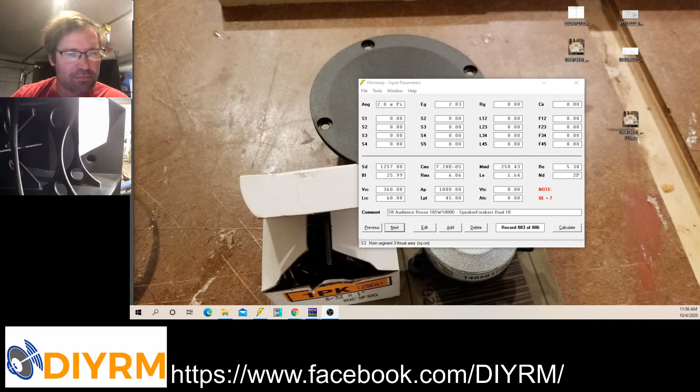Everybody, let me know if you can hear me well. I have changed my audio around from last time. I'm actually using a mini DSP right now for the microphone. Turn that video off. Hey, Brian. Hey, Daniel. Yeah, I did a quick recording and it seemed a lot better, so we'll use this. I've actually got a really nice large diaphragm Audio Technica microphone, but it requires 48 volt and another interface, and I haven't gotten to the point where I've got that thing mounted on a shock mount boom hanging over my head, but maybe we'll get there at some point.

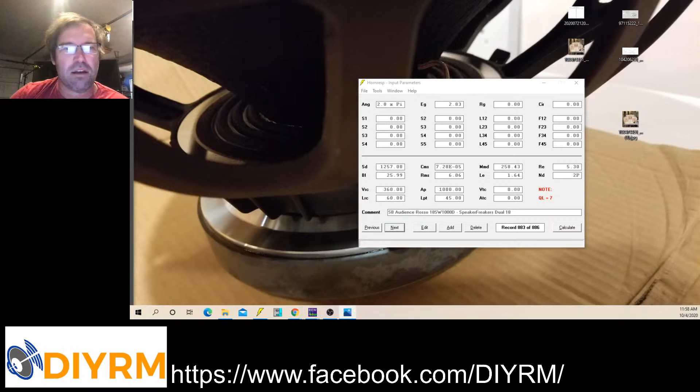So I should pull this up. Give everybody a little in-process picture here. We'll wait a few more minutes, let folks join. Yeah, the interface regime on this thing is already getting a little crazy. Oh, I just remembered. I have one where one channel is broken, but the other channel works just fine. I might pull that one out, but then I've got two different brands. What I really need to do is, my mixer can serve as a digital interface too, and I may just have to go there one of these days. So we'll see.

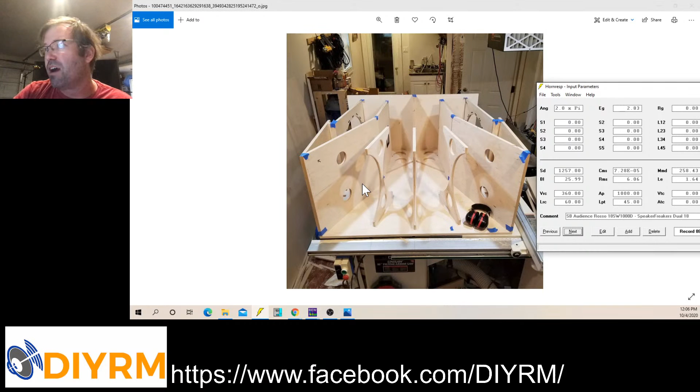And even then, there's still going to be some sort of higher order modeling effects for the airflow and things like that it may or may not take into account. But David, in general, has done a phenomenal job, and the fact that he gives this thing away for free is amazing. So if I'm ever where he is again and we can meet, he's got dinner on me for sure. And whatever bottle of wine he wants to pick off the menu, frankly, for as much as I've used this thing.

So it used to be that if you're going to do a horn-loaded speaker in Hornresp, it was a lot of sort of trial and error to even remotely get the inputs started. The input to Hornresp can be a little challenging. Until you get the hang of what means what physically, this interface doesn't make a lot of sense, right? So right now I've got a bass reflex. Recently, David has added an input wizard feature that is far more advanced. I don't remember which of the billions of versions of the program that came out in, but it's been quite handy and takes a lot of the pain and difficulty out of it.

How do you determine QL? You can only input QL for a bass reflex box, which is what this record is, and for larger boxes, a QL of 7 to 10 is about right. Smaller boxes or some sort of heroic construction, you can get higher than that. Remember that, but we'll get back to that. As soon as I go to, let's say, a horn-loaded box, you can see that the QL thing here goes away, right? So you can't enter Q anymore. I don't know if David will ever add that feature, but we'll see.

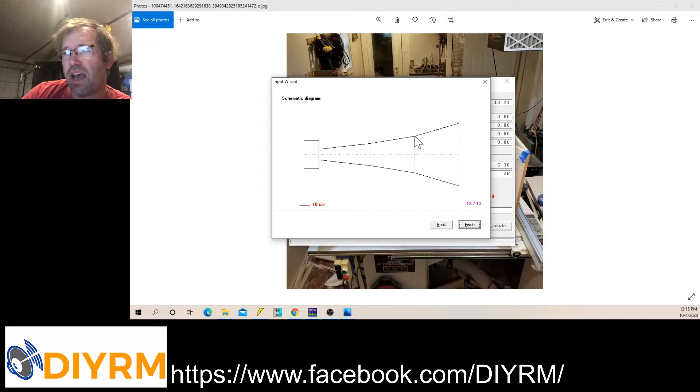This value here is S1. This is L12. This is S2. This is L23, S3, L34, S4, okay? And so when I say finish, it has chosen their default loudspeaker; it has not put the real speaker parameters in there. When I select finish, it generates this file for you, which is really handy because you used to have to sort of know how to put all of these things in.

And so I can calculate it, and lo and behold, because that is a beastly driver, and he sort of already knows which driver he's picking for this thing, he gets a pretty good response out of this. In fact, that's an excellent response. But what you'll see is it's not really so much of a bass horn. It's got 105, where's 102? F3 of 80 hertz. So I would call this a kick if you were in the PA world. This is much more of a kick, or even low mid, depending on what you wanted to call it.

But going back to that schematic diagram, you can see it has transferred everything in there. You can start changing this. Now, the easiest way to modify a horn in Hornresp is not to enter things onto this screen. I don't find that particularly easy at all. I hit Control E, and that pulls up an entry format that he calls the Loudspeaker Wizard, and you get these sliders. I find this to be far more useful because you can go to the power, which is the SPL of the system, and you can start changing things, and you can see what's happening to the resulting frequency response.

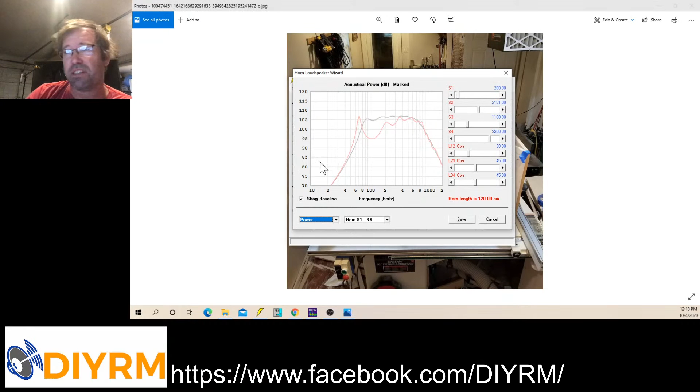Okay, for instance, I just made S2 very large. In fact, S2 is now larger than S3. And if we go back and look at the schematic for this thing, this is going to be a very funny looking horn, right? And you can see that that has been very bad for the frequency response. You wouldn't want to do that, okay? But if you're not using his driver, this screen is a great way to input your parameters and understand what you're doing physically very quickly, instead of entering them into the previous one, hitting calculate, and then trying to remember the way they were and how much of a difference it has made, right?

So we're going to go back to not a flower vase on its side here. And we're going to take this back to the horn-ish that was originally generated, okay? So I've chosen conical here, and I have no idea what the difference is going to be, but I'm going to change them all to parabolic, and lo and behold, whoops, release capture results, capture current results, input parameters. Now we're going to change them back. So tools, compare captured. I have now compared the difference between the parabolic and the conical expansion for those lengths, okay?

Where I found that it actually starts to make a difference is if you're doing really long tapped horns. But very often I don't find this to be enough. Again, check, make sure that you haven't simulated something wrong, but I would check this pretty regularly, okay? So there are some rules of thumb for large bass horns, right? You see these all the time, printed out, about mouth circumference being a wavelength, and total length of horn being at least a quarter of a wavelength and things like that.

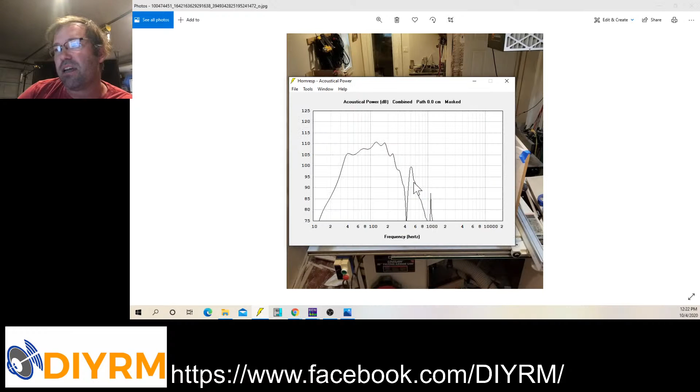So this is the horn that I have built that's behind me. And it is an offset driver horn. So I'm going to hit calculate here, and we're going to see this response. And first thing I'm going to do is go to the schematic, okay? So this schematic view confuses a lot of folks, I think, in Hornresp, because they don't realize what they're looking at. These circles here represent the driver. They represent the enclosure for the driver. Again, he's assuming everything's a round circle, right?

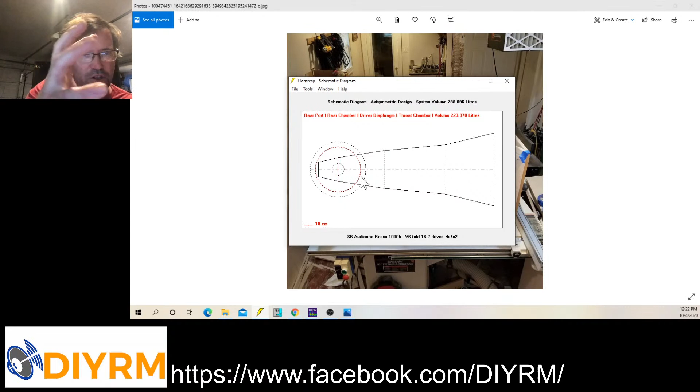They are, and it's sort of turned, instead of front way, to sort of look at you, right? And so I'm actually on this horn injecting the pressure from the driver into the point at S2, okay? I converted this horn to a front-loaded horn so you can kind of see the difference between the schematics. But when I do that, it puts the entry point into S1, which is too tiny. Okay, and we'll get to that in a second. That's compression ratio, and that's too tiny.

So now you can see that this is the rear chamber. This horn is actually ported. It's a rear-ported offset driver horn. It is not a simple design. We'll get to why I did that in a second. Yeah, so this is the schematic for the horn. You can see that the total box size is just under 800 liters, okay?

On Wednesday, on my Facebook page there on DIYRM, I released a sort of tongue-in-cheek, laughing horn folding flowchart, which Brian mocked because he does these way cooler spreadsheets. In fact, he has a spreadsheet, if we can convince him to release it, for this type of fold.

No pressure, Brian. I'm not trying to peer pressure. Peer pressure. Not trying to peer pressure. Yes, I am. Yeah.

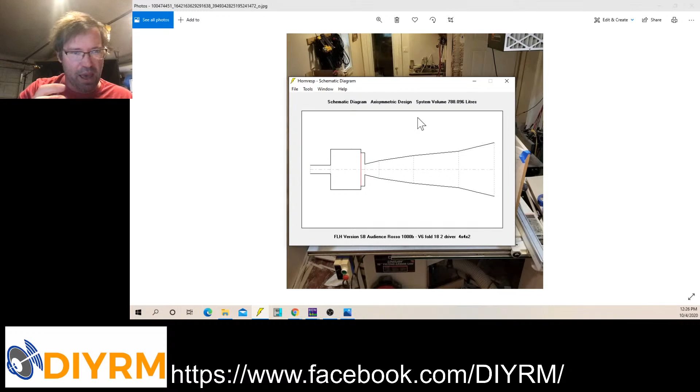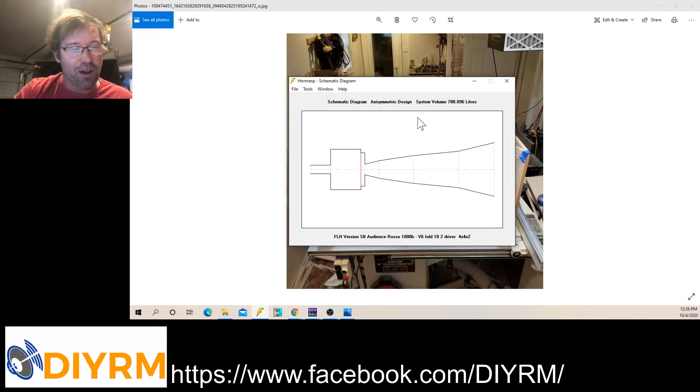With Brian's great spreadsheets, that iterative process is a little less painful because it's much easier to shift panel dimensions around and just export the record, import it into Hornresp, and voila, resimulate it. Versus if you're trying to do a really fancy fold that's not covered by one of those spreadsheets, like the fold that I have here, and I don't know the Visual Basic behind those spreadsheets well enough to start creating one or modifying one, and so I ended up having to do this sort of very painful graphical way. And I have an example of that. And I don't have SketchUp on this machine.

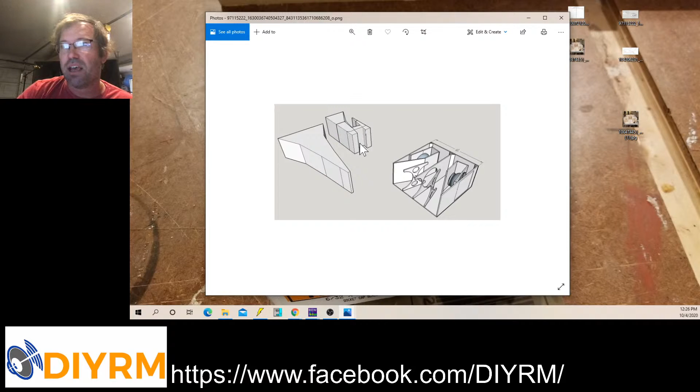But this is the example of how I did that, right? So the first thing I did was sort of create this 3D shape of the fold. Then I cut it in half and I started wrapping it around so that I could fit this thing into a box. And with enough tries, I could actually go back and forth, and you can see where I was. Let me zoom in on this some.

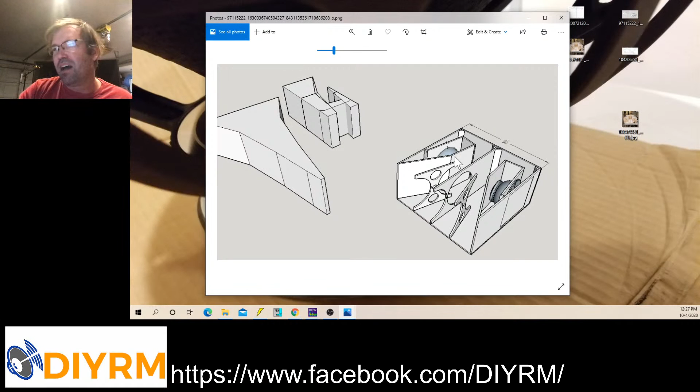You can see here where I was sort of playing with the S3 or S4 dimension here, the second to last dimension, in respect to getting the magnet for the driver that I had for this speaker to fit. SB Audience was very nice and gave me access to some of their Rosso drivers, which I'll show you a data sheet for in a second. But the catch with that woofer is that the magnet's gigantic, which is awesome. Like, that's an awesome thing. But then when you try and put this into a rear chamber, you've got to fit that magnet in there. Okay, and so there's this iterative process that you do.

All right, let me close out of there. So let me go back to the actual horn. So I'm going to run through some features in Hornresp that I don't know if a lot of people know are there. Okay, so the first thing I'm going to do is, actually, I'm going to turn editing on. So the first thing I'm going to do is show you this is the predicted response, and here, let me again zoom in on that, is some measurements I took. Now, take these measurements with a grain of salt, especially,

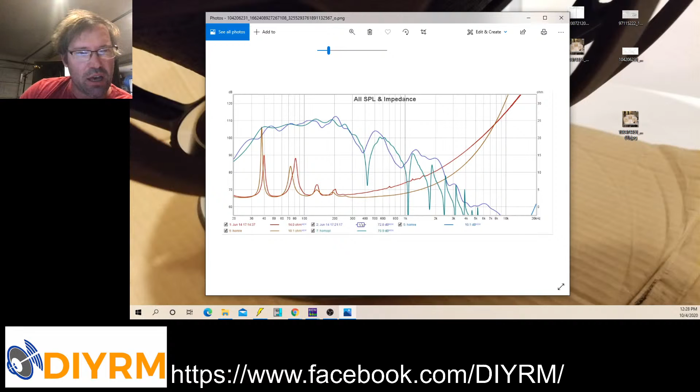Do I prefer a compression driver with a good horn or a 3/4 inch dome tweeter with a good waveguide? Yes, I prefer them all. It depends on what I'm doing with them. If I'm doing a high output PA speaker, obviously I will prefer the compression driver. If I'm doing a Synergy horn or co-entrant Unity style horn for home audio, I will probably still prefer the compression driver. But it all depends on the application, right? I have heard some phenomenal sound from relatively low-cost compression drivers that give you dynamics that a 3/4 inch or a 1 inch dome tweeter cannot hope to achieve, period.

So this is the simulation versus the measurement of one of these horns. Down low, I actually think that it's probably a little bit closer than the response would indicate. There was a lot of change in response based on microphone position when I was doing this. I was doing this in my back alley, which you can't see because the garage door is closed behind me. But there is a 3-story apartment building next to me. There is an 8-foot tall fence behind me. There's my house, which is 2 stories. So there's all kinds of stuff that is in the way. So this isn't a true anechoic measurement as much as I'd like it to be.

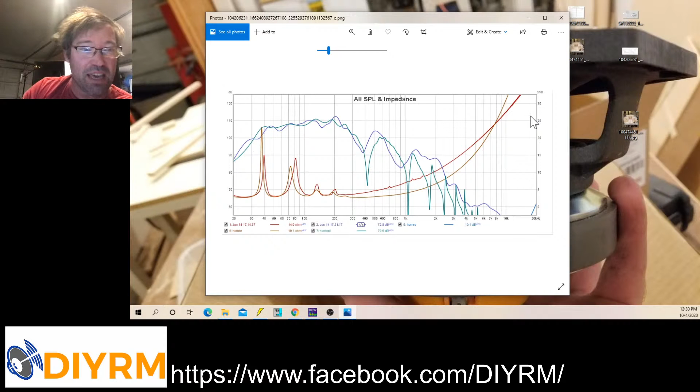It's just not. And if you measure a horn too near field, then your response is not quite right. There's reasons for that. But yeah, I basically couldn't get the microphone far enough away and not pick up ambient stuff. So I have a feeling that they're actually even a little bit closer. So to me, even this amount of agreement is not bad. Like, this is pretty good agreement. My guess is it's a little closer.

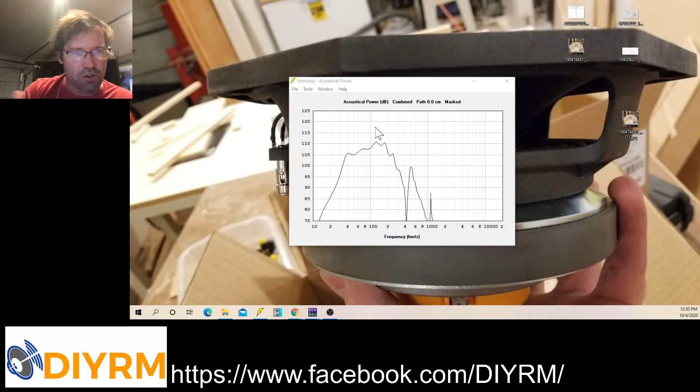So one of the things that you have to realize when you have this sort of imperfect horn, right? This mouth is too small, right? Is that when you put two large front-loaded bass horns together side by side, they acoustically see each other and they will help each other out.

So they see each other and they get benefit. Now let me show you, because Hornresp actually models this pretty well. Okay, and I've confirmed this multiple times. So first off, let me capture these results. So what I'm going to do is I'm going to change the input voltage from 2.83 volts to 2 volts. Okay, calculate, tools, multiple speakers. And now I'm going to put two whole speakers in parallel with each other. Now, by going from 2.83 volts to 2 volts and doubling the number of speakers, I'm keeping the input wattage the same. Okay?

And now I'm going to compare captured. Okay. See how at low frequency I actually get a boost there? That boost is real. They help each other out, and you have even higher sensitivity than you otherwise would. Okay, and this has been shown. I have shown this with Danley... Hennessy battle axes. I have been lucky enough to measure a fairly large block of them in a field. To do it at any reasonable input power, to start looking for compression, things like that, I had to put the microphone 70 feet away. But this benefit is real, okay? I can show you even more benefit.

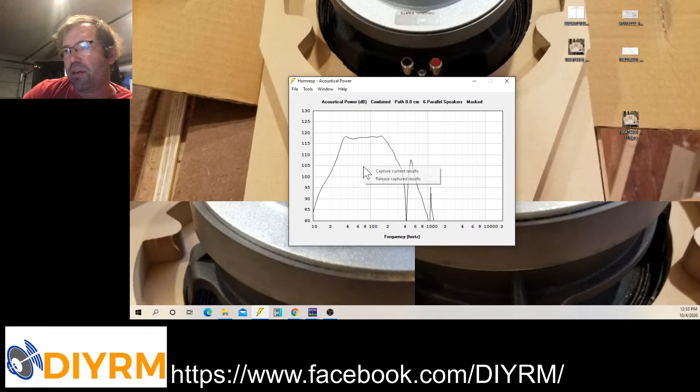tools, compare captured, all like this up and down ripple has gone away, right? Because now I've made the mouth large enough. They all sort of couple to each other. Tapped horns don't get this benefit, or if they do, they don't get it nearly as much. I don't think they get it much at all, actually. And even Hornresp shows that in the modeling, if I remember correctly. It's been a while since I've checked that.

All right, so what are some other cool things that Hornresp does, right? It'll show you, of course, the diaphragm displacement, group delay. All those are neat, right? Hopefully, if you've used Hornresp at all, you'll recognize those things. But let's go back to acoustical power and double click on efficiency.

It actually will calculate for you the electrical to acoustical efficiency. And this is where you can see this horn does pretty well, right? Up in the higher registers, it actually has quite high efficiency. It's pretty unheard of, but it is actually happening. But you're not going to get it easily at 80 hertz, or what frequency is this? 70 hertz, 60-something% efficiency, okay?

The other thing it will do for you is, if you go to output, port, whoops, let me do this, output horn, okay? This is the output of the horn by itself, and I'll talk about that port in a second. Okay. Tools, sound pressure, throat chamber exit. It will actually calculate the amount of pressure in pascals, which you can convert to PSI, on the driver diaphragm.

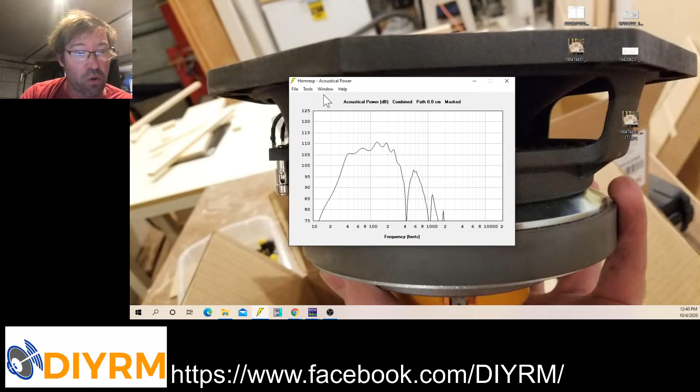What else? Ports. I mentioned that I was going over the ports. Okay. So the ports in this horn design that I've got behind me are not designed for low frequency output. I don't care. Their output is so negligible compared to the horn itself that I'm not using them for output.

I'm using them because front-loaded horns, especially big ones for PA use, tend to have a problem in that you take this driver and you put it in a tiny box that's sealed. The front of the cone can't see the outside air. The back is completely enclosed. And so now this driver has no way to cool itself.

Within the PA industry, it is well known that this happens, at least with the folks that are experienced with big PA horns. And you will see, for what are otherwise very high output speakers, some long-term limiting settings that you look at and go, that seems really low. But if you can't get the heat out of the box, it's realistic, right?

If you think about how hot a 150 watt light bulb gets, if you put that 150 watts into a 3 cubic foot box, that air temperature in there is going to be raging in short order, and you'll actually burn up those woofers pretty quickly, right? Whereas if you put them in a vented enclosure where there's heavy air exchange through the vents, there's some fresh air replacement. JBL had a great paper on this in the AES.

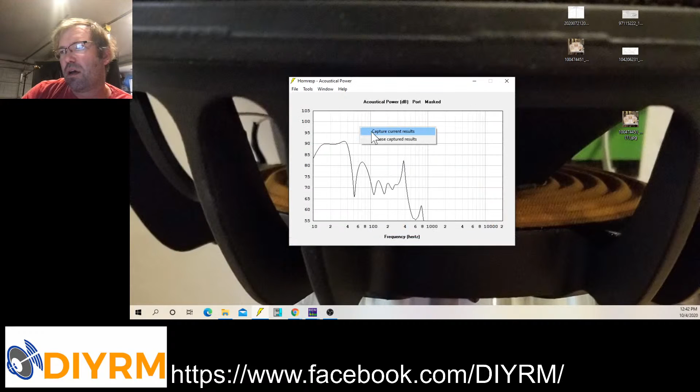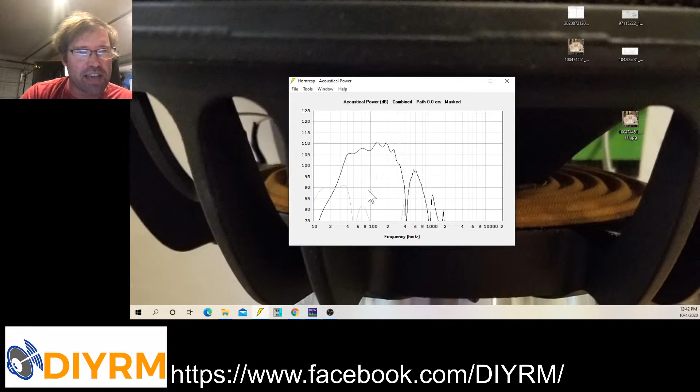So what I did is I took output port, tools, compare captured. Whoops. Come on. Release captured. Capture results. All right. Tools, compare captured. So right now you're looking at the output of the port versus the output of the horn. Notice how little the port actually does for this thing. It is solely there for air exchange.

Okay. So now we're going to go to another feature in Hornresp. Let's see. Another feature in Hornresp. Let's see. Any questions? I'm flying here, so I don't want to.

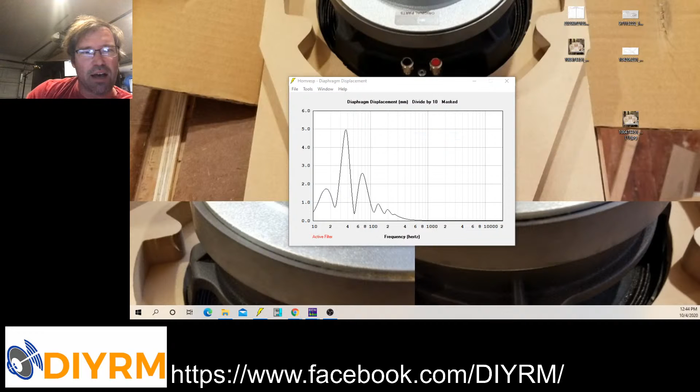We are going to add a filter. Filter Wizard. High pass. Fourth order. Actually a little high for this. So now I have put on a high pass filter. And now you can see where I've kept the displacement at low frequencies down. And you can see where I've kept that diaphragm pressure way down. Okay, so now I have aided this quite a bit.

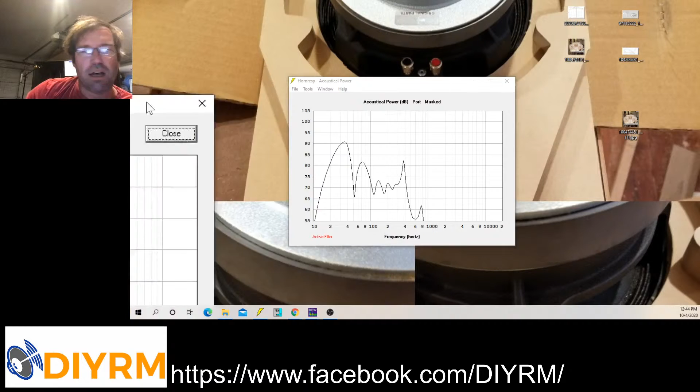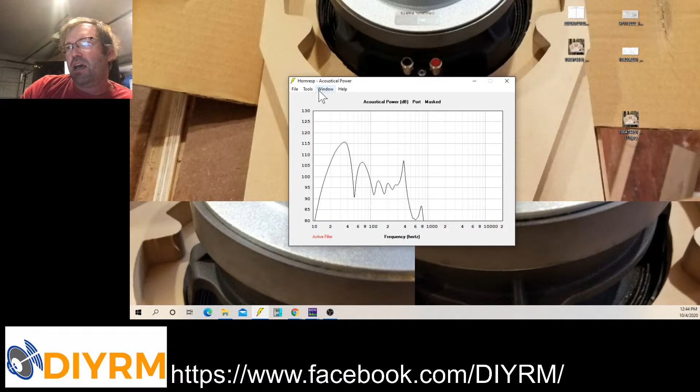But if I go to acoustical power, tools, output, port, tools, particle velocity, port, I actually have not a tiny port velocity here, right? So if I go to a drive level that is more apropos, oh, not 300 volts. Woo! That's a cone fryer right there. Actually, let me go back to tools, Window, acoustical power tools, output, combined.

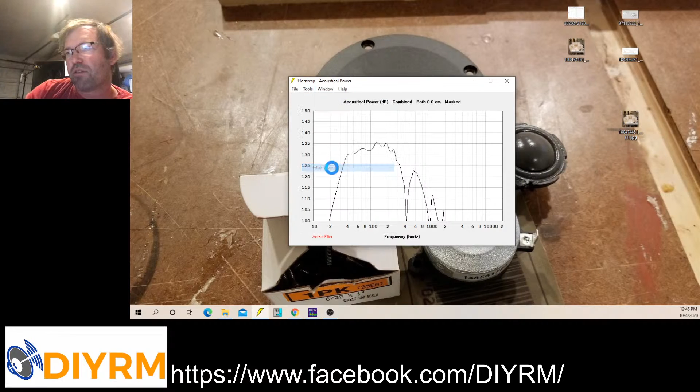Okay. Yeah, this is a level that you hit all the time in pro sound, right? For periods of time, you know, even higher, frankly. Wait, tools. I think my filter turned off. Maybe it didn't. Nope, filter's still on. Okay. Tools, output, port. So now I've got higher output in the port. Particle velocity. Lo and behold, that is the type of port velocity that you would see. And in fact, since it's over 17 meters per second there, the air is going to be going nonlinear, and you will start to see significant air exchange through those ports.

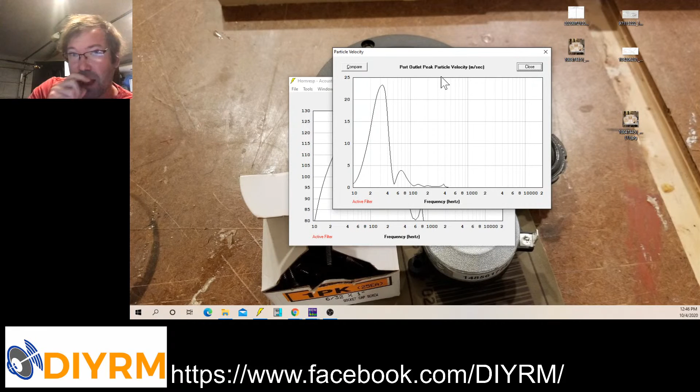I have worked for the last 3 weekends to try and figure out a way to demonstrate this without destroying the structure of my house. Yesterday, I made a valiant effort with some power dissipation outside of the drivers. I had big resistors on big heat sinks and things like that. But at some point, I just need to find myself a field or an airport hangar and just torture test these horns, because every time I try this, either the volume is so high that I have to turn it down for fear of a noise ordinance violation, or the test is so far from reality that it's not working well. I know this works. The JBL folks showed this in the paper for bass reflex boxes, but I just can't seem to show it on these.

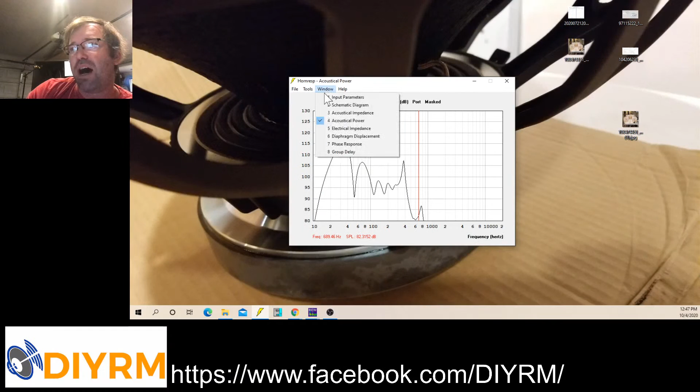So let's see what else. So those are some of the fancier features. There's a lot of stuff here in terms of being able to show particle velocity, pressures, diaphragm displacement, and things like that. I am a big fan of looking at those when you're doing horn design, right? If you're looking at just frequency response, and Bennett Prescott from B&C has gone into this a lot, what you see may not meet this classical definition of good frequency response, like the QB3 alignment where you've got a nice smooth thing. In horns, you're just not going to get that until you get huge groups of them.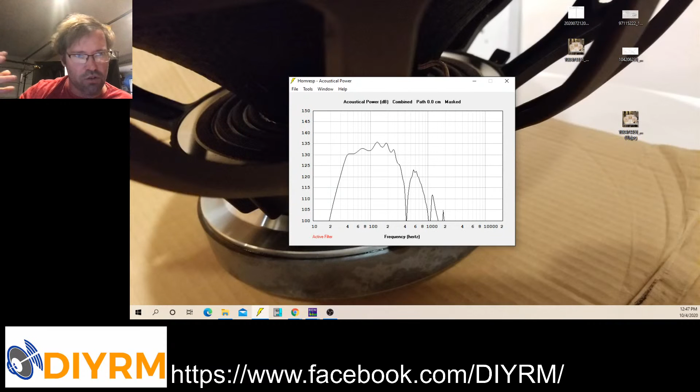And while we do that, we're gonna see how well this does. Yeah, there we go. My wife is gonna kill me. I don't know if she's ready for this. So I thought I'd give a little demonstration of the horns. Yeah, let's see how this goes. Oh, did you guys hear that? Did you see that? Yeah. I'm getting blasted with about 130 decibels of 40 hertz, 31 hertz here. What I do for science.

I'm having way too much fun now. Any questions? Daniel. Should I hit it harder? Oh, sorry. I should have warned. Yeah. The mic is not going to get overloaded by that. Not at the distance it's at right now. Sorry, I should have given you more warning.

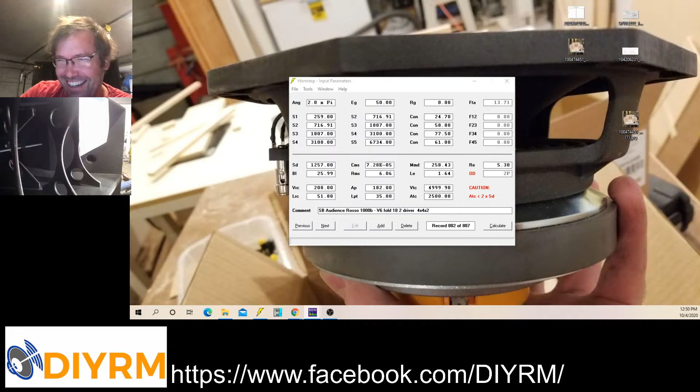And let me talk about the driver that is in here a little bit. Our peer pressure worked. Yes. So Brian did a spreadsheet for this horn fold. If I remember correctly, it's half the horn, right? So you'll have to sort of double all of the areas and things like that, because it's only giving you one half. So if you simulate it and you see an even raggedier response than you expect, that's because the mouth is way too small. It's only half the size that it should be. Or just make a really big version of one of these horns, and that's fine too.

So the driver I'm using is from SB Audience. They are known for their SB Acoustics drivers, probably a lot better, although in the Far East they're fairly well known for their PA drivers. I have in this box the 18SW1000D.

It is a pretty heavy duty driver. It's got one little issue on the spec sheet. I swear they mean Xmax or Xdamage of 25 millimeters one way, even though this note says two way. But healthy Xmax, healthy power handling, voice coil diameter, shorting ring. I don't have a good picture of it here, but

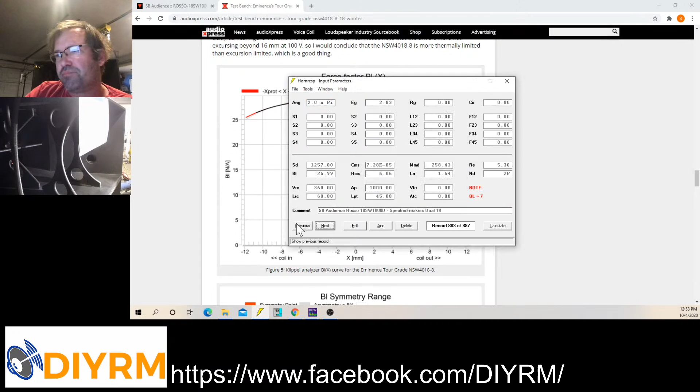my next project is going to be using the Eminence NSW 4018s. I still don't know exactly what I'm doing with those. I'm trying to do something more than just a normal vented box. It might be that, but it might have some fancy ports. Might not. I'm not sure.

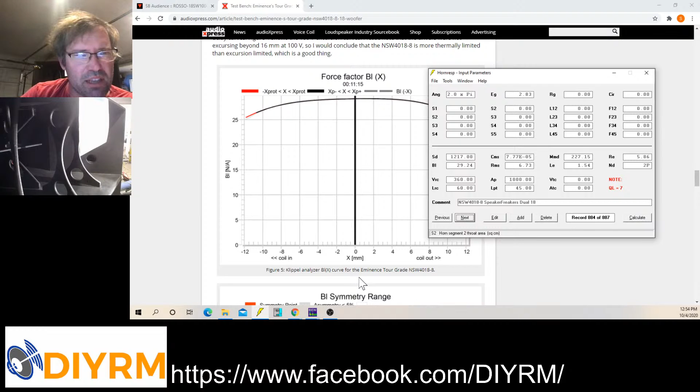Yeah, so Brian brings up the semi-inductance, right? Lossy inductance, I'm not a big fan of. Semi-inductance, I think I am. I need to dig into that one even more than I have the lossy inductance. The lossy inductance was based on a spreadsheet curve fit that, as far as I can tell from the paper I've seen on it, doesn't have a lot of pro sound drivers, and it assumes that, how do I put this? Basically, they curve fit on inductance versus BL, and they curve fit to frequency response shape, right? There's a problem with that.

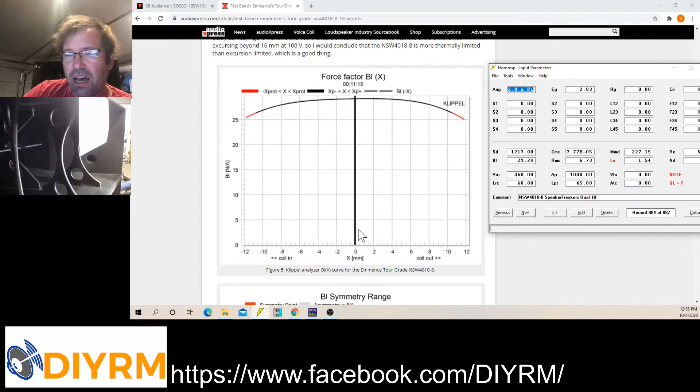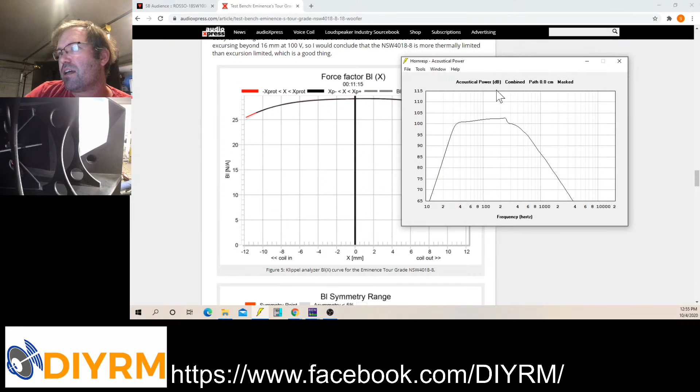So if I double click LE, whoops, I got to edit it first. If I double click LE and I hover over BL for this Eminence driver, the spec sheet has a BL of 29.24, okay? If you hover over it, it says that the adjusted BL is 24.2. If you look at the Klippel curve, which directly measures BL, nowhere on this curve does it drop below 25. So it makes a pretty big difference in this one. So capture current results, calculate, tools, compare captured. Right? So the difference in terms of response is not trivial, but

even the paper I read, I think it was just a guy on DIYaudio.com, he's like, but the impedance is wrong and things like that. Well, if the impedance is wrong, does that mean your excursion's wrong? Does that mean all these other parameters that I just showed are right? There's some issues there. So I think it's a proxy for something else that's going on in the modeling, or even the measurement technique. I'm not 100% sure where it is, but because it changes one parameter and one parameter only to a value that doesn't actually represent what's physically measured, I'm not a real big fan of it. This is something that has been bothering me about the Lossy LE for a while.

The semi-inductance model is better, right? And if folks like Andrew Jones and Scanspeak are swearing by it, okay, I'll pay attention and believe it then. But the Lossy LE, I'm not a big fan of, and I don't think it's the right way to go. Any other questions? That wasn't even a question that I just dove into.

But yeah, next project's going to have these guys, the Eminence, and these things are beasts as well. I'm looking forward to this. The only reason I haven't done something faster is I want to do them justice. When you hold them in your hands, you're like, oh, that's pretty serious. I also have a set of 18XL2000s that I've done an entire box around, a bunch of measurements around, but have never turned it over as a project. So I think that might be a fun head-to-head between the two of those.

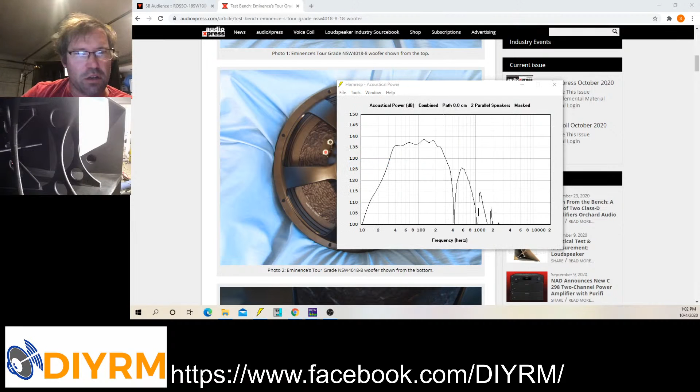Notice that the impedance has dropped because there's 2 in parallel. Actually, wait a minute. Tools, acoustical power, tools, multiple speakers. 2 in series, 2 in parallel. Now we'll bring it back up to, dang it. Window. Here's where I'm trying to go too fast. Electrical impedance. Tools, compare capture.

I can do that pretty easily even in my setup where I just point the speakers out of the garage door, measure the impedance of one with the other one shorted, turn the other one on, and all of a sudden, they're not electrically in parallel. They're totally separate channels of the amplifier. And the impedance of the speaker that I'm measuring shifts, right? So you can actually see that. You don't see that impact on direct radiators nearly as much. It's microscopic, okay?

Right now I have a cheap 10-inch sub with Thiele Smalls. Can't seem to get a good response, whatever the model of the box. Yeah, I mean, there's some drivers that have just really bad parameters. If it was a really inexpensive driver, I've seen inexpensive 10, 12-inch woofers with a QTS of 1.5, and there's really not a lot you're going to do at that point except put them in a small box and EQ them and hope that you can get enough power into them that they don't burn up, and enough output power. So that's about your only choice, unfortunately.

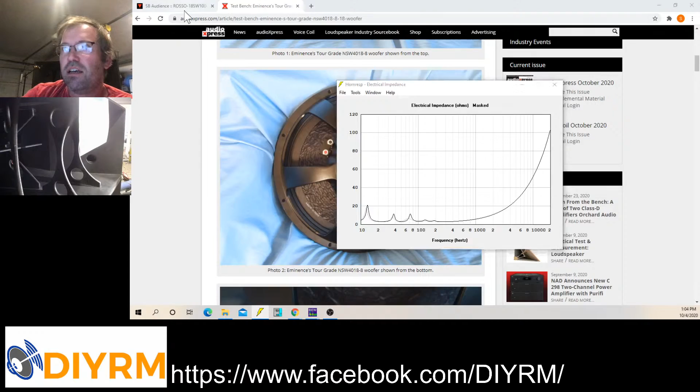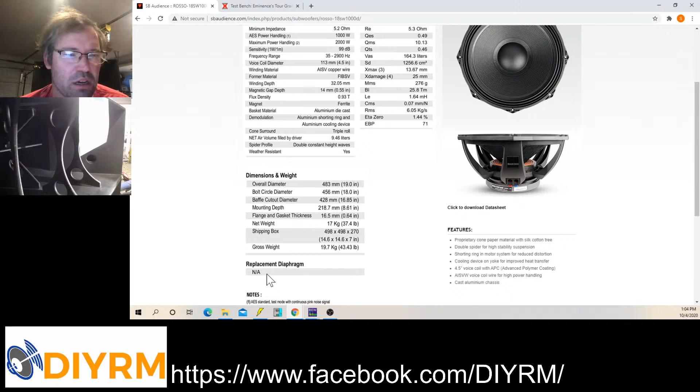Shove it up against the wall. Yeah, it's always easier to look at impedance. Brian is right. If you can get that impedance simulation to be on, then you know physically what's happening.

So, if you're in the United States and you're looking for SB Audience, go to Madisound. That's who has them now. This driver is available in the United States. They are available other places. I have gotten some questions previously on where you can find these.

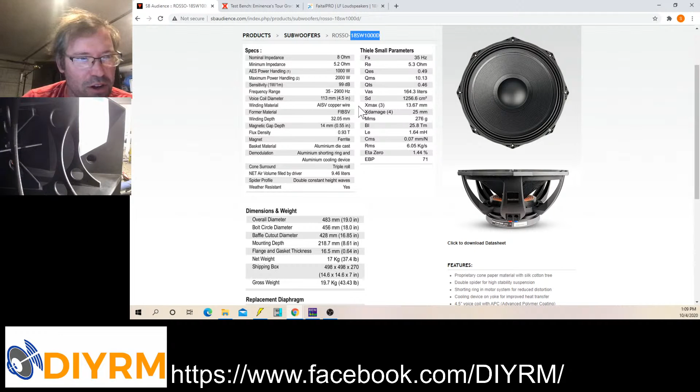In fact, input, next. If we do this, capture current results window, input, calculate, tools, output, compare capture, release. I was still at 50 volts, which is not fair. Capture current results window. Next. Yes. Calculate. Tools.